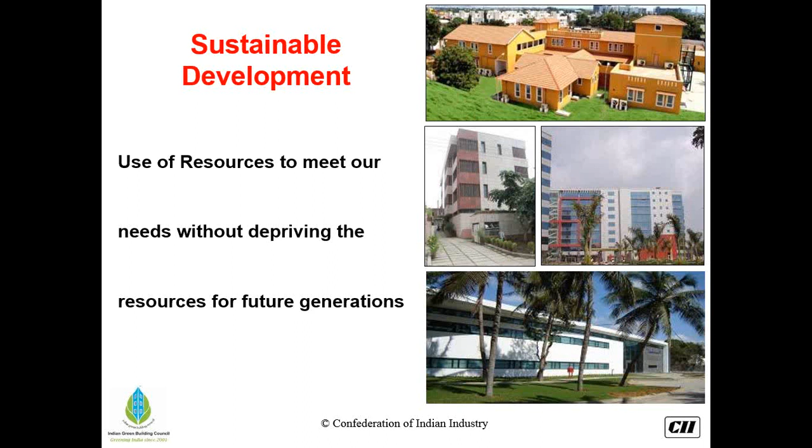So sustainable development is nothing but looking at resources which we can conserve and which can be kept for the future generations. What is green? Green is not just a color anymore. Now we are seeing green in a different perspective. It's a pursuit in whatever we do in our daily activities, like the energy we consume, the water we consume, whatever materials we use, how we are going to use them effectively. That's what green is going to depict here.

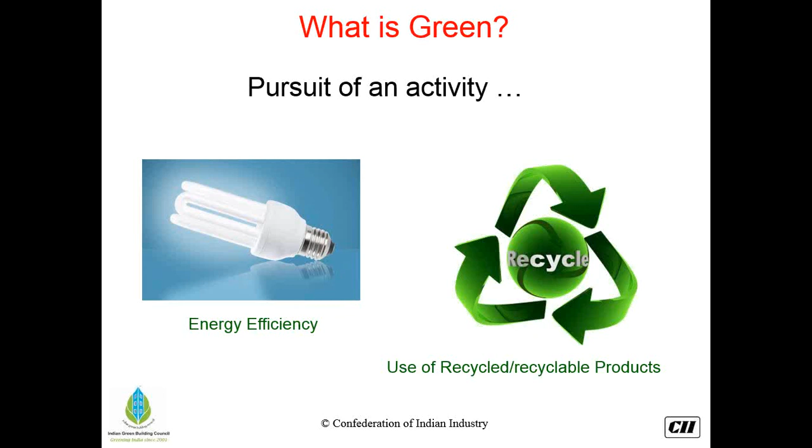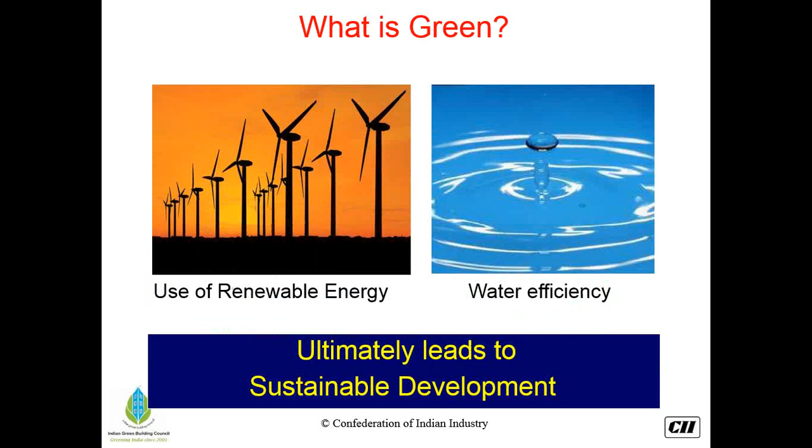So the main activities which come under sustainability are energy efficiency, use of recycled or recyclable materials, use of renewable energy, and water efficiency. So all this together is what we are talking about, sustainable development.

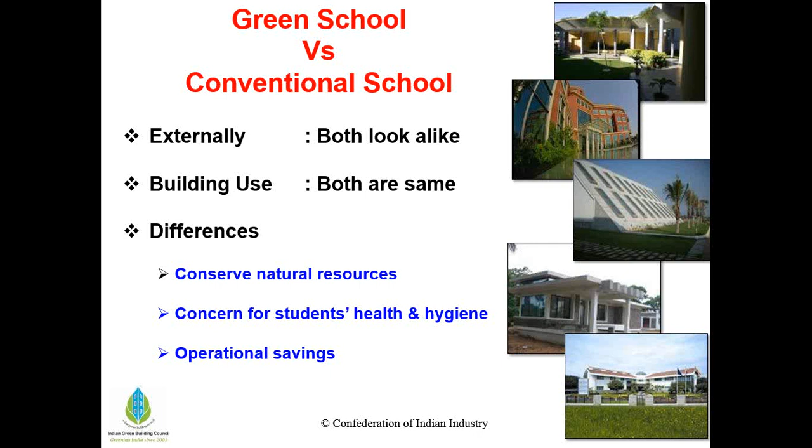So if you compare a green school versus a conventional school, externally they look the same, and the building usage will also be the same, but where the differences come is in natural resources, whatever we are using, like water, so that we can conserve them. And besides this, the biggest benefit is how we are having concern for the students' health and hygiene. So this is going to be the impact in your green school. Another important benefit would be the operational savings.

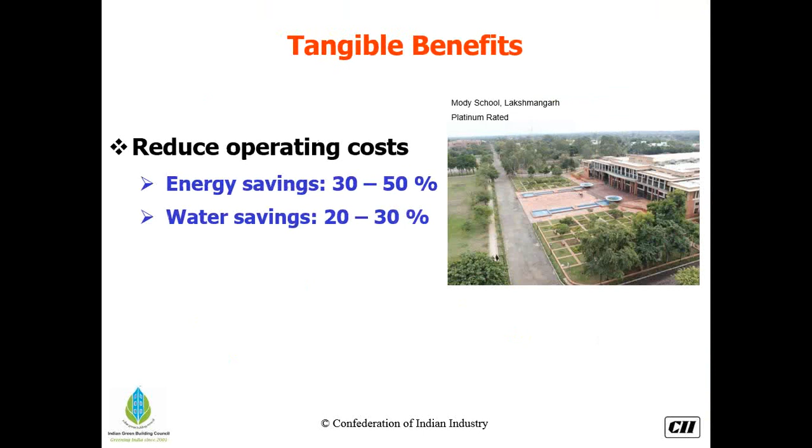So these are a few tangible benefits which we can see if you compare the conventional building and the green building. Reduced operating cost, like energy savings of 30 to 50% and water savings of 20 to 30%. Intangible benefits are like you can improve the output of students because we are enhancing the indoor environment. The productivity of the students will be improved in green buildings.

This is also another step: we are hearing about green in this generation, but the future generation is going to be the students who are occupying the schools now. So we are going to instill an idea of green in the students from here itself. So this will be another intangible benefit which will impact our future also.

There is a saying by Einstein: if we are given an hour to save the planet, we would spend 59 minutes to define the problem, so what is the existing problem we have to think about, and 1 minute resolving it. So our further presentation will follow on this note.

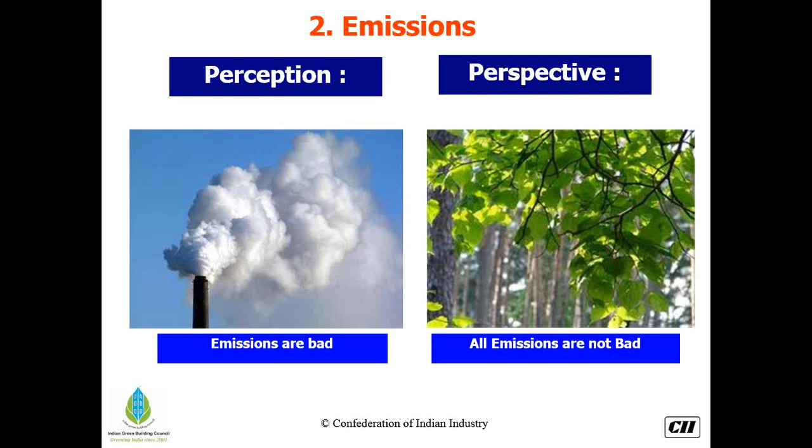So what we can do: if we see, in a day generally a human eats around 800 grams of food and drinks around 3 to 4 liters of water. But if we look at air, we take about 17 kilos of air per day, which is very huge. And if we convert it, a healthy grown tree will generally emit 20 kilos of air per day.

So each person needs more trees than whatever oxygen they are consuming. That's why we recommend more trees to be planted. Please don't see having vegetation as a waste of land. It is required for habitat maintenance and also for improving biodiversity in our environment.

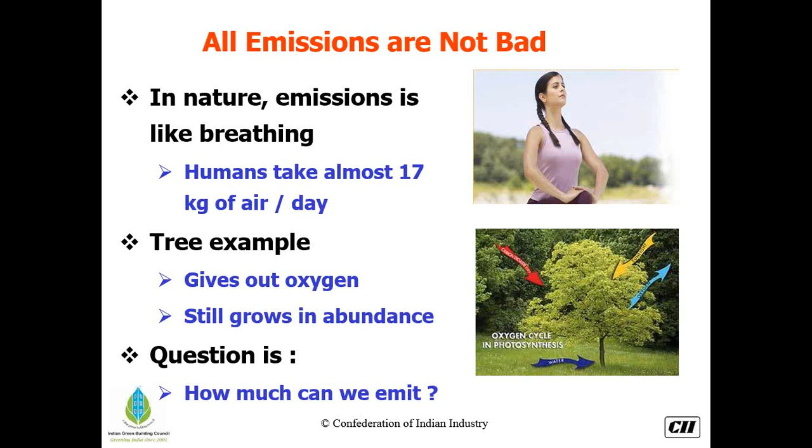So with whatever day-to-day activities we do, by travel or anything, we emit so much carbon dioxide. It is going into the atmosphere, but how can we reduce it? One of the major solutions we have is to have vegetation.

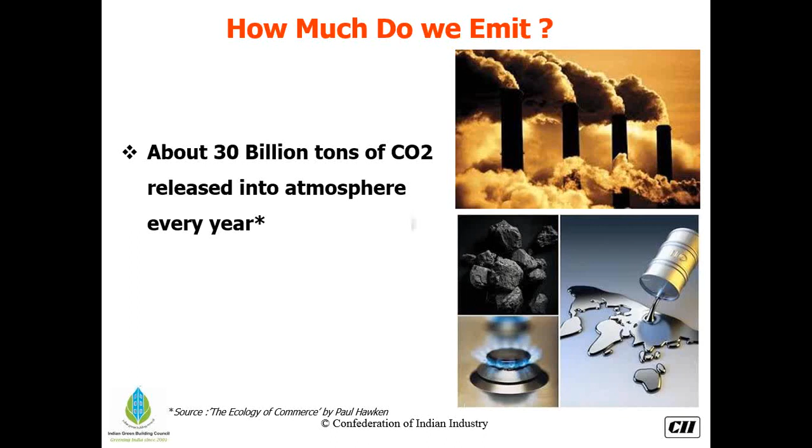Transit. We all transit every day. We see petrol or diesel bills going higher every day. We feel that okay, we'll pay even though it's increasing because it's a need. But what happens if we are willing to pay, but there is no fuel existing? We have extracted all the fuel. What are we going to do?

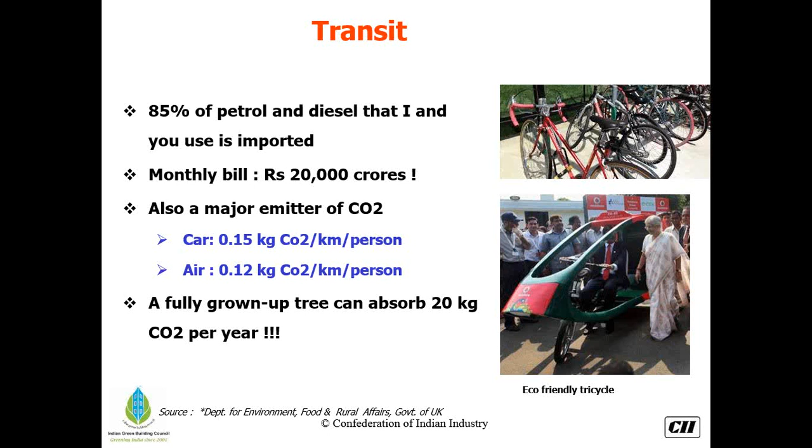So if we see the other perspective, that's where we recommend alternative transportation methods. Like you can use bicycles or you can do carpooling so that it will reduce the emissions to the environment. So these are a few alternative transport methods people can think about.

Water. There are many strikes, and many people do rallies saying that we are depleting our water sources and even the lakes are diminishing. So what do we have to do? But from the other perspective, with whatever water exists on our site, how can we reduce the water consumption on our site? If we see it from that perspective, that will be better to conserve our natural resource of water.

So the solutions would be: you can have treatment plants, you can reuse your wastewater within the site, and even for irrigation, you can have efficient irrigation systems. These are a few solutions where you can have water efficiency.

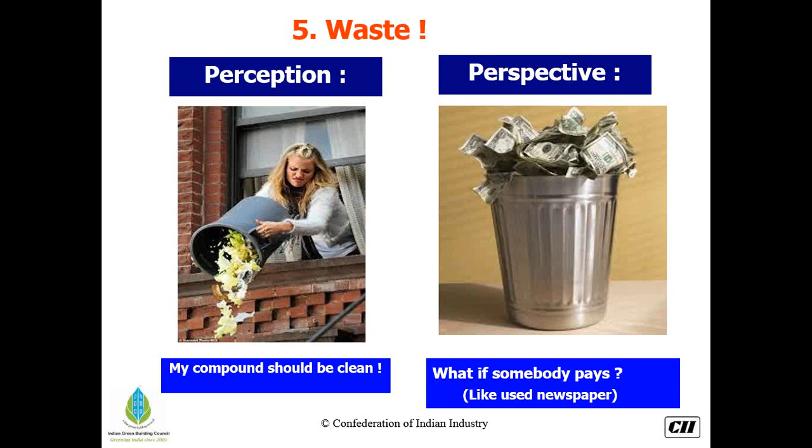Waste. This is a bigger problem many countries have. We always see waste as something that is going to give us a problem. It will be dirty, it will smell. So we want our environment to be clean every time. But if we see it from a different perspective, even waste can give us money if it can turn into an economical source. Like paper, we always sell our newspapers to the recycle vendors. So why don't we do the same with others also?

We can segregate our waste, paper, metals or plastics, and send it to recycling so that it will not be in a landfill creating emissions to the environment. At the same time, it is creating economic value for the rag pickers in India.

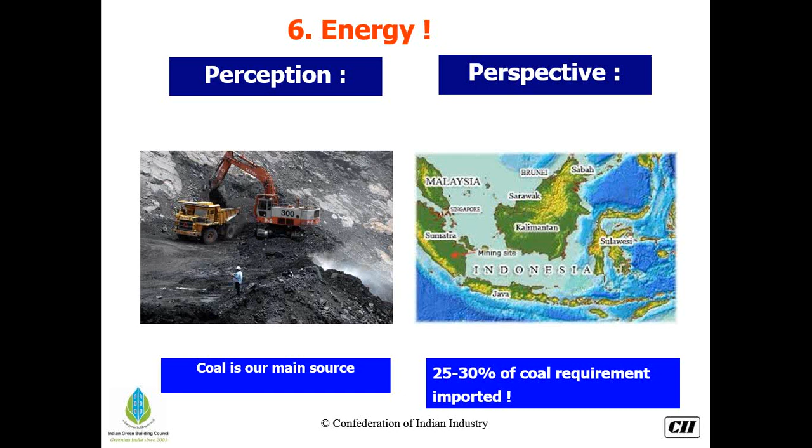Another important point in buildings is energy. Most buildings now have air conditioners. Other than this, we have lighting, fans, everything which consumes a lot of energy. For the creation of electricity, coal is the main source in most of India, and most of the time we are sourcing the coal from outside. We are importing it, and we are getting 55% from Indonesia itself, and the other percentage of coal from other countries.

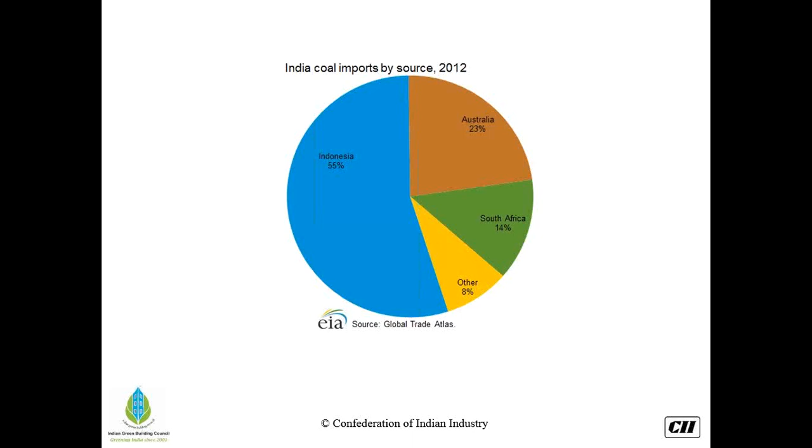So this is also affecting our GDP in India. So how can we reduce our energy consumption so that it will also have an impact on the country's GDP? Not only the country, even for an individual building, if we can reduce energy bills, it will be helpful for us. So renewable energy is one of the solutions to reduce our energy consumption.

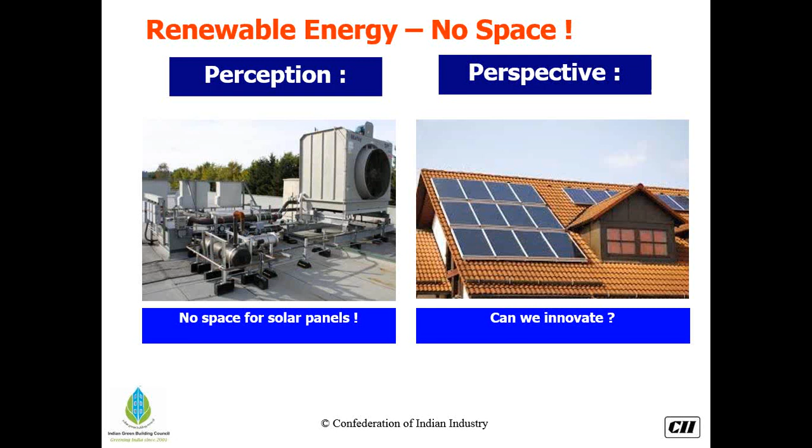When we say renewable energy, most people say our buildings' roof areas are mostly covered with equipment. We don't have any roof area to have solar panels. But we can look at it from a different perspective: how we can design our buildings so that we can install the solar panels in the building itself.

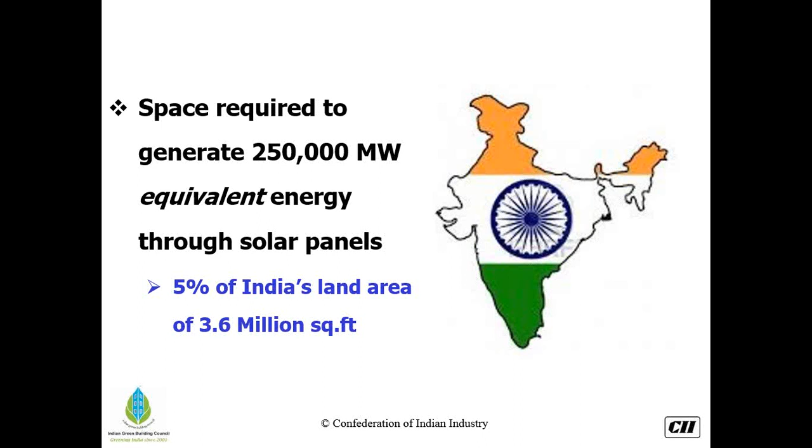Actually, this is a survey done, and we got to know that for whatever consumption we do in an annual year in the country, we just require 5% of India's land area to install the solar panels. So we have huge scope here, but it's just a requirement. We have to just feel how the renewable energies can help us in reduction of energy consumption.

So these are the initial perceptions we have given on green, how this has impact on our day-to-day activities and how it is affecting not only the country but even the world. So now we'll just get into our main topic, green schools. What are the major things which schools can implement so that they can convert their existing schools to green?

This is the CII IGBC vision: we want to facilitate and support 1,000 schools by 2017 to turn into green schools. With this vision, we have formed an IGBC Green School Committee, which does various activities related to schools. We do competitions related to environmental activities. We do quiz programs. We even conduct workshops, and one of the major activities which we have launched is the IGBC Green School Rating, where we want to promote guidelines to the schools on how they can convert into green schools.

As I said, the green school rating system is the rating system which we have launched recently. It includes the guidelines, and it is applicable both for new and existing schools. It's not just for new schools. The top 10 green attributes which we are going to address today are related to health and hygiene, education, universal design, green lung spaces, handling of waste, water, energy. So these are the top 10 green attributes which we are going to address today.

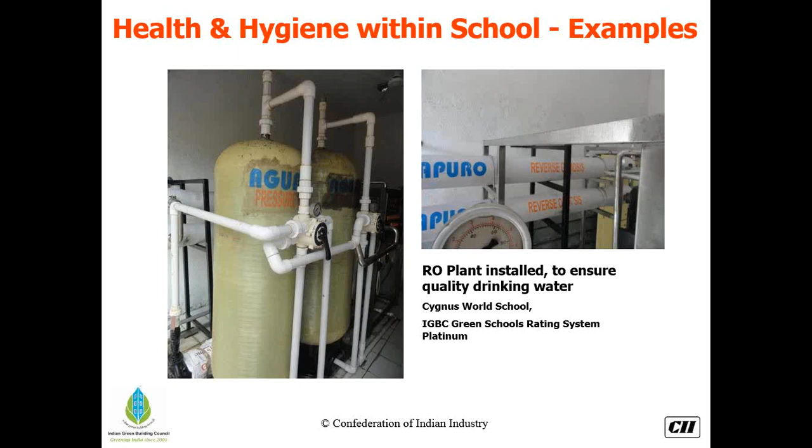Daylighting, as I said initially, has intangible benefits like improving the students' performance. Daylighting and ventilation are the points which will have impact on your students' performance. So daylighting you can provide. We have guidelines in the rating system: if you have a minimum of 200 to 300 lux daylighting in your spaces, it will bring much improvement in your students' performance.

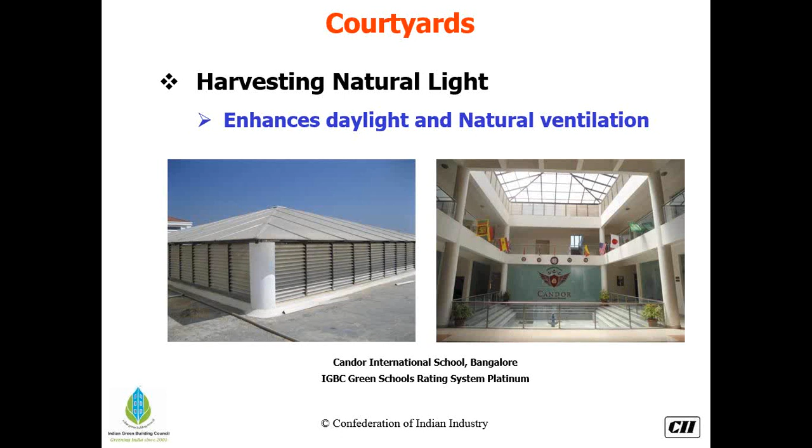So daylighting can be provided by having open courtyards, even the windows, whatever you are providing. If they can provide daylighting, it will be good for the students to better read and also see the presentation or whatever is written on the blackboards. These are the new technologies available when there is no space and they want to have daylight.

The next important point is on fresh air. Most of the schools do have enough fans or air conditioners, but at the same time fresh air is also required so that we feel better, or we feel healthy in the interior spaces, because most of the times there is no fresh air. The students stay there for a long time, and since many of the students are present in the same classroom, when there is no fresh air, they'll feel dizzy or feel nausea kind of a thing. So when proper ventilation is provided, they feel more comfortable.

So fresh air is recommended, and to have more fresh air into the spaces, we recommend cross ventilation. When cross ventilation is there, air is distributed all over the space in the classroom, and it also reduces infections, because they play, so there will be a lot of dust in their shoes or in the clothes. So this will reduce the infections from whatever they are carrying when there is fresh air coming into the spaces.

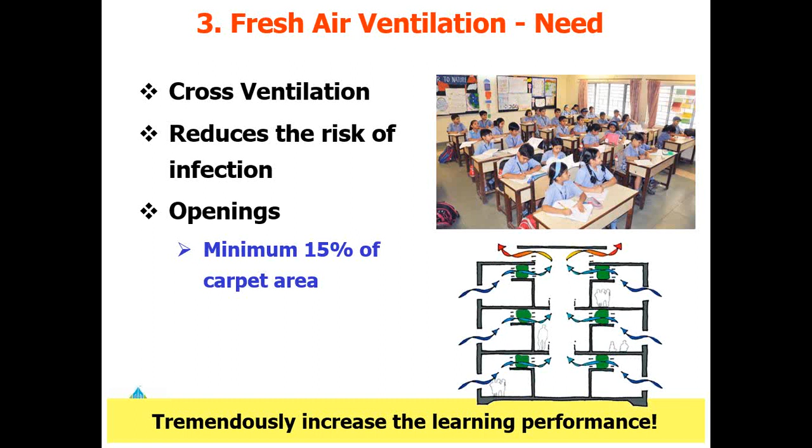So for that, we recommend that at least 15% of the classroom carpet area be provided as openings like windows or ventilators; even the doors are considered as openings. This will help fresh air come inside the interiors of the classroom. This is again the Salwan Public School where we have taken pictures, and there is a lot of fresh air coming through the ventilation provided.

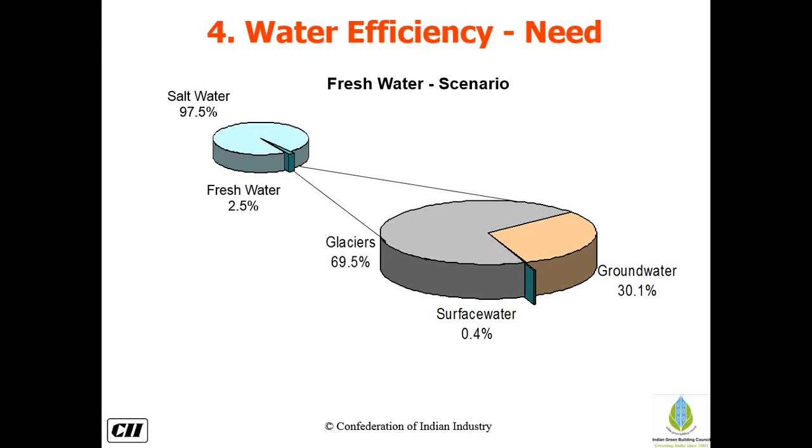So the next topic is on water efficiency. All of us know that Earth is filled with water, but of whatever water we have, 97.5% is salt water. So the fresh water availability is only 2.5%. Of the fresh water, whatever we can use is only the groundwater, which is only 30% of that 2.5%. So how we can reduce our water consumption and how we can have more water for our future generations, we have to relook at it.

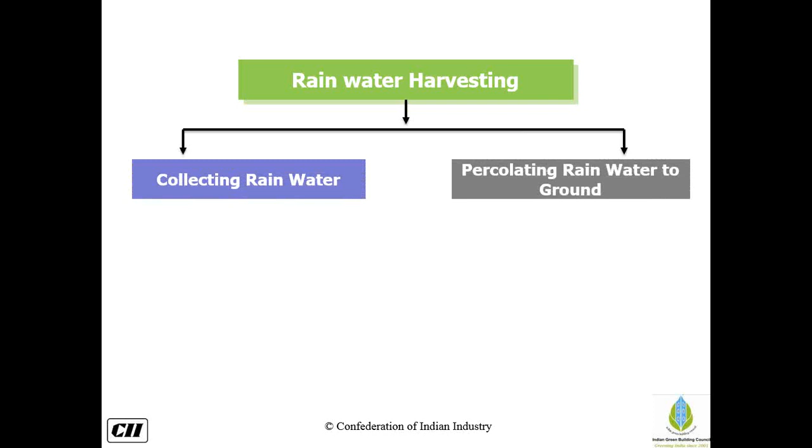One of the important solutions here for water conservation is rainwater harvesting. This is the natural source which will be generated within your site, within your school campus. So whenever you are getting rainwater, you can either collect it or you can restore it. This will help in collection of rainwater, a natural resource within your site, and also in percolating it within your site.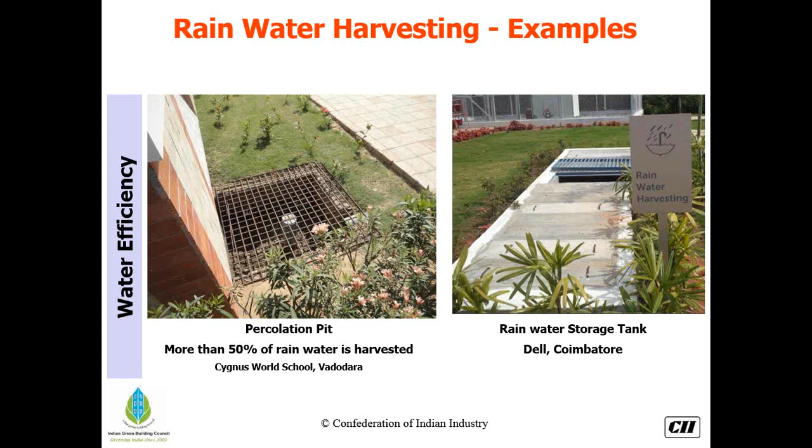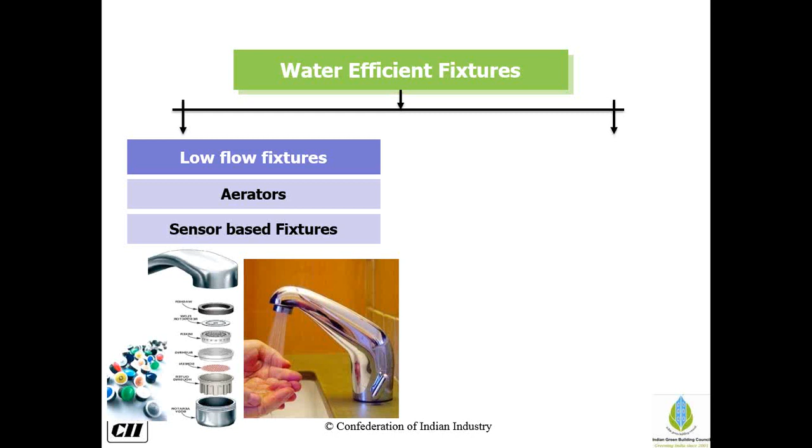So the next point, after rainwater harvesting, is on water efficient fixtures. Other than harvesting, most of the water consumption in buildings or in schools is either by drinking or by your fixtures in your toilets or in your pantry. So how we can reduce the water consumption in your fixtures we'll be seeing here. Now in the market there are many new manufacturers coming up with efficient fixtures like low flow fixtures, where the water will be coming slow, but at the same time you'll be reducing the water consumption.

Suppose there are existing schools and you already have fixtures fixed and you can't do anything. In that case, the solution is the aerators which you are seeing on the left hand side. There are aerators available from 15 rupees to even 3,000 or 5,000 rupees. So you can just use these aerators, which can reduce the flow of the existing fixtures in your school. That's how you can reduce it.

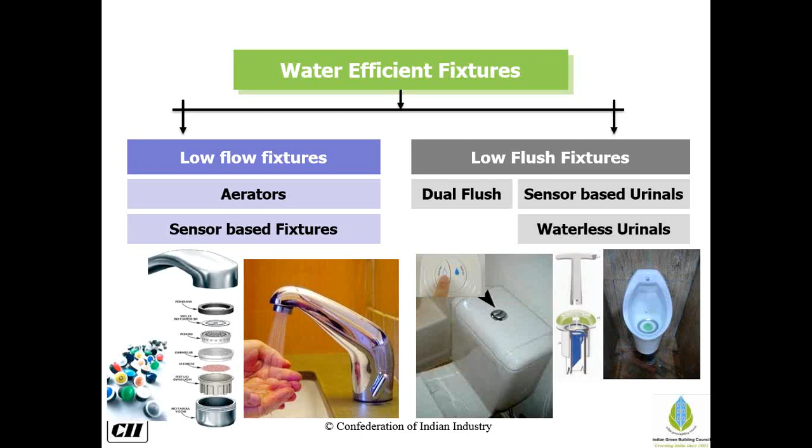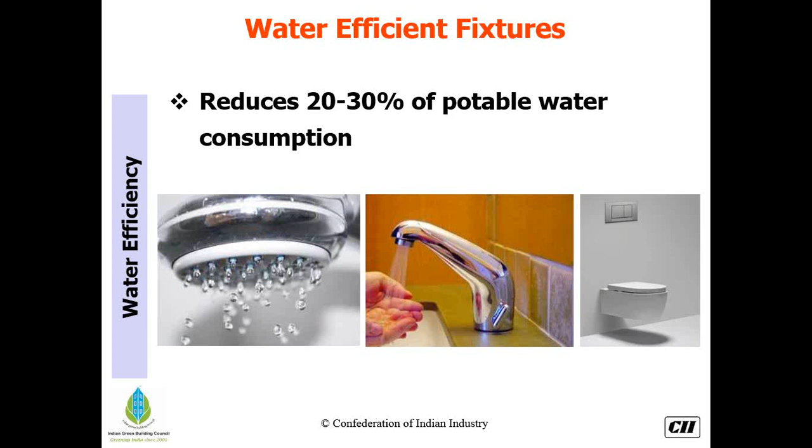And there are also flush fixtures now. Most buildings now are implementing dual flush fixtures, so there will be a reduction in water consumption, and also sensor based urinals are there, so they automatically flush when it's required. By having efficient fixtures itself, we can reduce 20 to 30% of the potable or municipal water we are using per day. So we recommend having efficient fixtures in new schools, and existing schools can have aerators to reduce water consumption.

Next, to reduce your water, is wastewater treatment. So we have seen how you can collect your rainwater and how you can reduce your fixtures. Now, whatever you have consumed, which comes out as wastewater, how can you use it? For wastewater treatment, we can have two types: either the mechanical way or the biological way.

The mechanical way we have been seeing for past decades: you can have an STP installed, treat your wastewater and reuse it. On the other hand, picking up over the past few years, is the biological way of treating wastewater, where plants treat the water in a natural way and you can reuse this water.

Phytoremediation. Phytoremediation is the biological way of treatment I was describing in the previous slide. The picture you are seeing is the existing phytoremediation plant in our IGBC center, which we implemented last year, and all the wastewater coming from our site is treated through this phytoremediation and we are using it for our irrigation purposes.

These plants are specific species that take the wastewater, and whatever waste is available, the nitrates and urea existing in the wastewater, they will consume. They take that as nutrients and treat it. The treated water will be collected at the end point and reused.

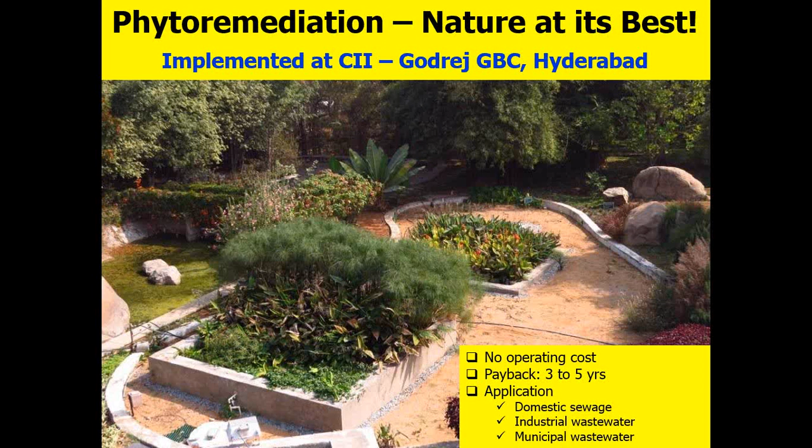If you see the advantages of this biological way of treatment: STPs are just a normal mechanical way, and you don't have any green spaces. Here, you maintain it as a garden space. They don't require any maintenance, only pruning. Whenever the plants grow hugely, gardeners just need to prune them. And as vegetation, they attract habitat. They'll not have any heat island impact because they don't emit heat outside, they absorb it.

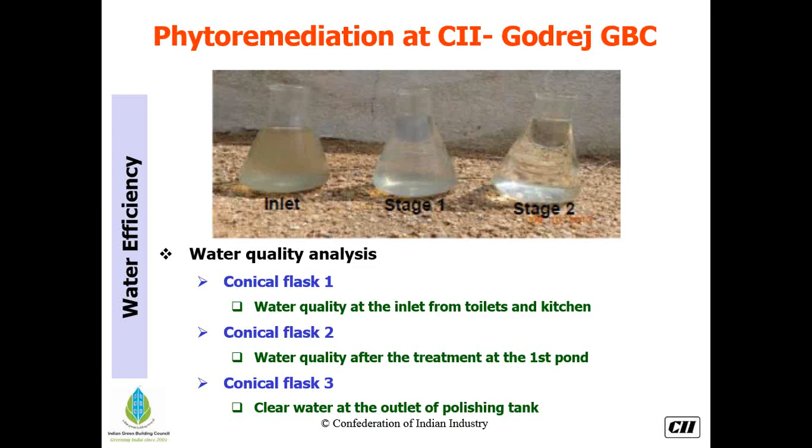This is a water quality analysis we have observed at our site. If you see the first conical flask to the last one, there's a lot of difference. That's how the water is treated by this phytoremediation, and we are using it. So these are a few features you can implement within your site to consume less water and conserve water at the same time.

Next we'll move on to energy. We see a lot of power cuts because there is a lot of usage of power, and as much energy as we are using is not produced. So how can we improve energy efficiency on our site itself? One of the major sources of energy consumption is the fixtures we use. Most schools use tube lights, so we can use energy efficient or BEE star rated tube lights, which can reduce your energy consumption by at least 20%.

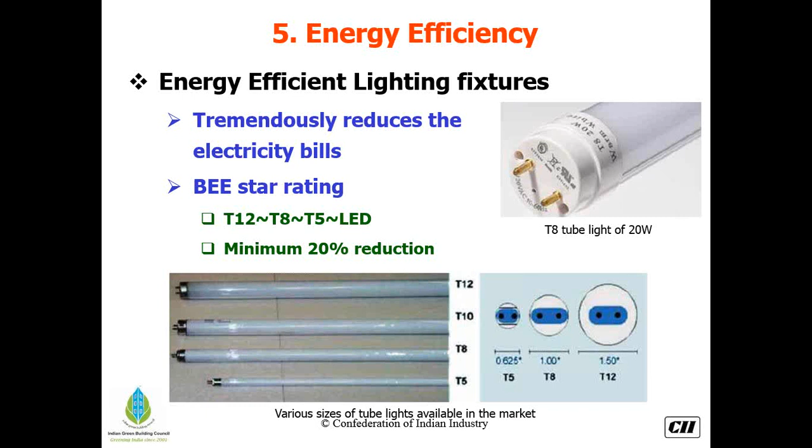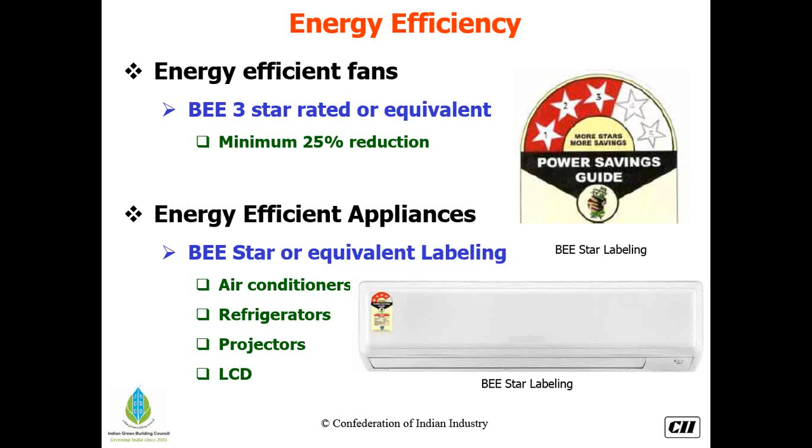Even for other appliances such as fans or split ACs in your classrooms, principal rooms or staff rooms, you can look at BEE star rated appliances because they consume less energy. Other appliances like refrigerators, projectors, LCDs, whatever you use in your school, you can go for energy efficient, star rated or equivalent appliances so that they consume less energy.

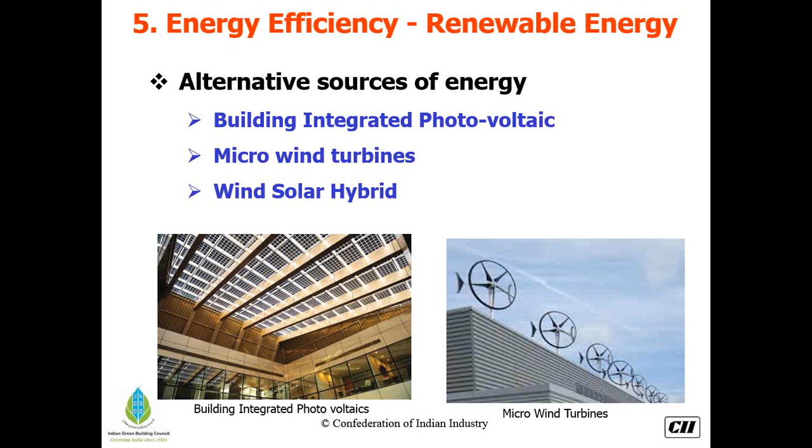Another way of reducing energy consumption is alternative sources of energy like solar panels, which you can implement on your buildings. A few alternative sources of energy are indicated here, such as building integrated photovoltaics, micro wind turbines, and wind solar hybrid. There are also hybrid renewable energy systems available. These are a few schools which have already implemented solar panels and are using them effectively.

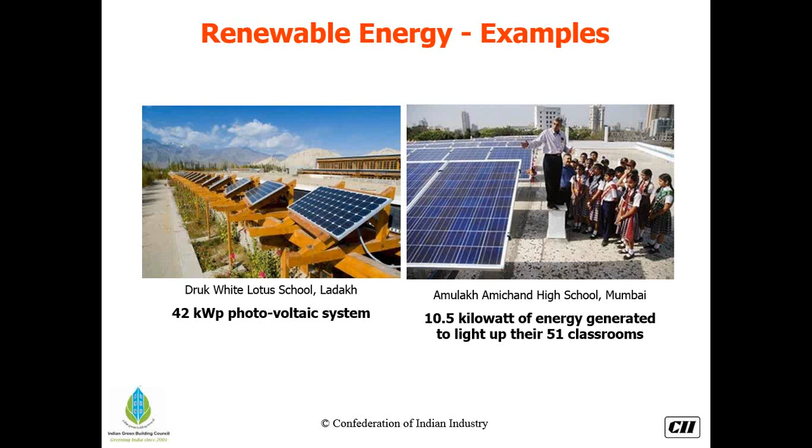Even if you don't have enough space to keep batteries within your school campus, you can connect them to the grid so the energy goes back and you can reuse it. Many states provide incentives if you connect these alternative energy sources to the grid. So you can think about how to implement renewable energy sources on your site.

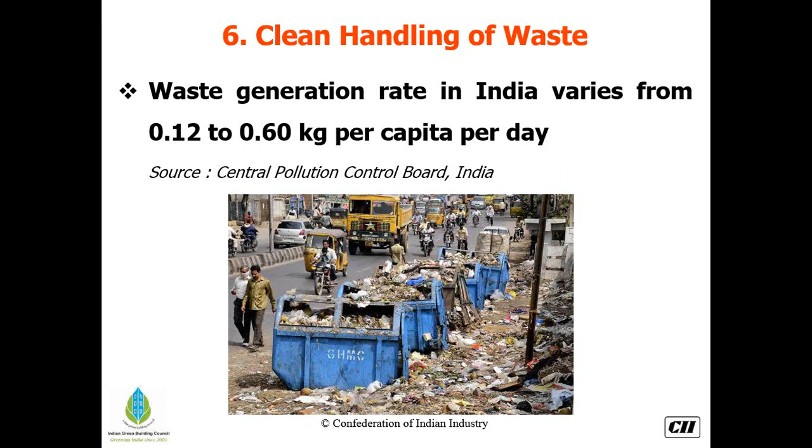As I said, waste is one of the big problems we face. Wherever we look there are a lot of landfills, even on the roads. It creates a lot of unhygienic conditions and health problems. Not only health problems, when this waste is combined in landfills, it creates emissions which cause global warming through GHG gases. So how we can reduce it is to segregate our waste at the source itself.

You may think there is a lot of waste already, and just by doing it within the building, how much can we do and how is it going to affect anything? But we have to start from our source; only then can we see a change. We as students are going to be the future.

This could be one of the activities you can tell them: whatever paper, plastic, or metal waste is generated in the classrooms, if they segregate it at the school itself, they can take that home. At home also they can segregate it. They will in turn teach their society that you have to segregate the waste and send it to recycling. Do not send it to the landfills.

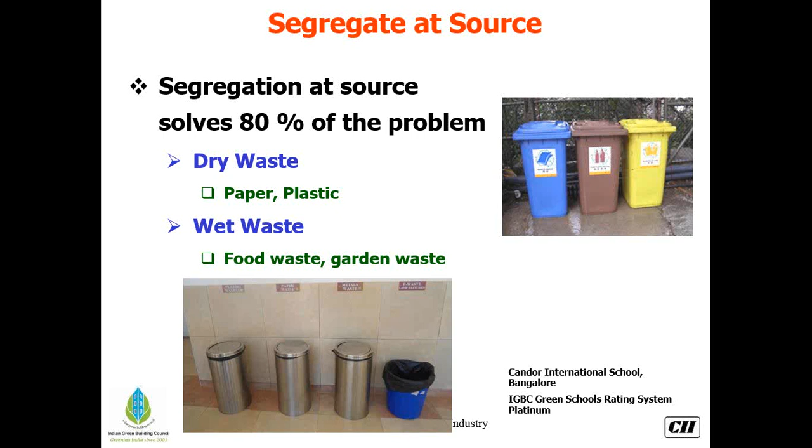So you can create separate dustbins for paper. Mostly paper waste is generated in schools, so you have separate paper dustbins, and also wet waste dustbins: the food waste generated during lunch times or snack times, they can put into the wet waste dustbins. Whatever dry waste is there, we can send for recycling. As you know, paper we send for recycling, and plastics can also be sent for recycling.

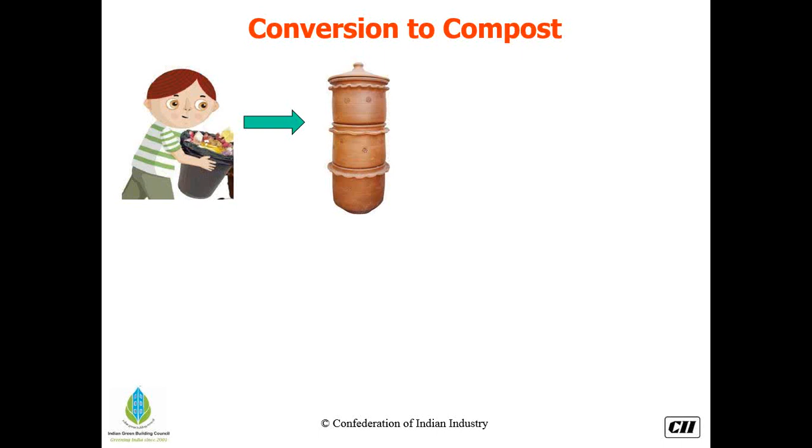You can just put your waste into this recycling canvas, and after one month of putting in your organic waste, it will turn into very good manure which you can reuse again for your landscape. So no more waste. You need not buy whatever compost is required for your vegetation. You can just generate it within your site itself and reuse it.

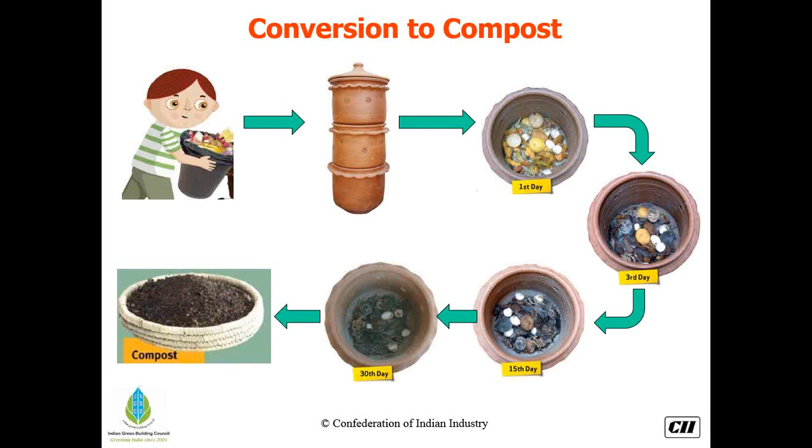These canvas bins are also very small, so you can just keep them in any corner. Even at homes, you can use them on balconies. So this is very handy and also very effective. This is how compost is generated from the composting beds.

Next is green transit. As I said, we use a lot of vehicles. Each one of us has a car in the house; we can see at least 2-3 cars for each house. So there are so many cars on the road, so many emissions, so much pollution being created. So we can think of alternatives and how we can reduce this.

Especially for schools, I think most of the schools in India do this. They have their own school buses where most of their students travel by school bus. So encourage your students more to come by school bus than by their own vehicles, so we reduce these emissions. And those who are nearby can come to school by walking or bicycle.

If you are planning, suppose many schools have a group of schools and they will be establishing new schools. When you are coming up with new schools, you can think about having the schools within a residential area, so that whoever lives in that residential area can come to the nearby school by walk or bicycle.

And public bus or rail: there will be a few schools, like municipal schools or even normal corporation schools, where some of the students come by public bus or the metro rail available in the cities. So select your new school site such that it's near the public bus stand or railway station, so that students will be encouraged to come by public bus.

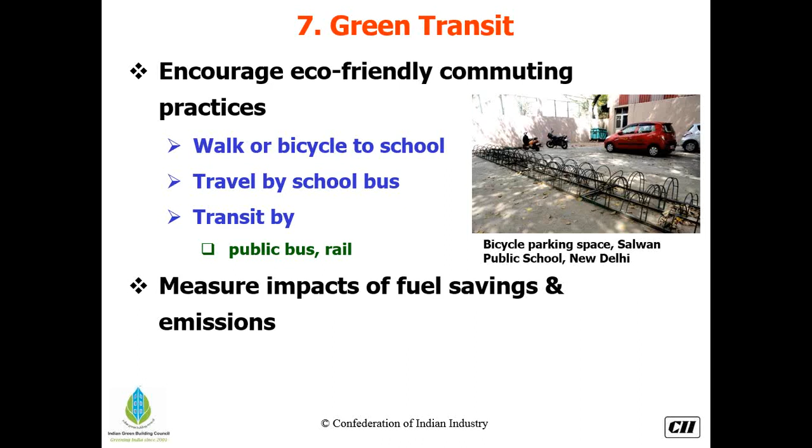Green lung spaces. If we see olden days, or even now, many schools do have them, but some schools don't even have the space to put small pots. We just see concrete spaces or paved parking spaces in the schools, which are creating a lot of heat island effects.

Heat island effects are nothing but these paved areas; they don't absorb the heat, they emit the heat into your environment. So they are creating a lot of heat, and there is no fresh air. Most of the time they are on the main roads, so whatever pollution is coming from vehicles will be coming into the school environment. So there are very few healthy spaces or green spaces in the school campus.

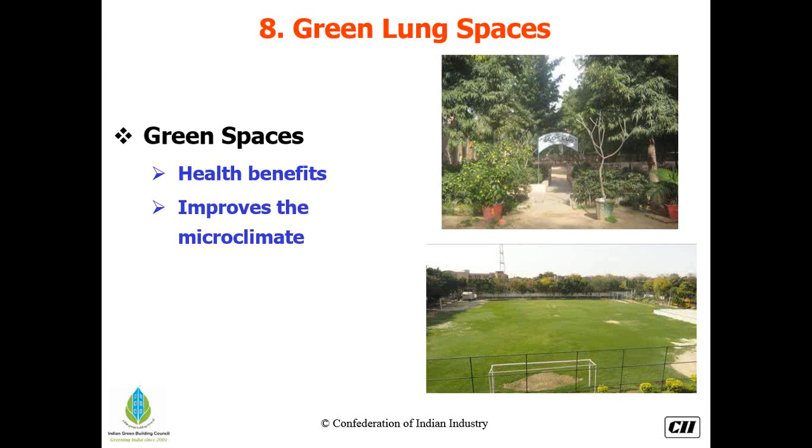So we encourage, please increase the green spaces in your school building. If you don't have enough setbacks, please come up with roof gardens. Even roof gardens will reduce the heat emissions inside your building, so the top floor of your school building will not have a lot of heat coming inside. So please encourage more green spaces.

A lot of schools are having, as a green activity, organic gardens. Their students themselves are developing them. So students own that activity, and they know the importance of the green or lung spaces required for them. This will not only create a healthy environment, it also creates good habitat for butterflies or birds flying in your site. This will also encourage biodiversity in the ecosystem.

Not only green spaces, but other activities too. Most schools don't have a playground itself. They have some other option, like they lease one and take their students to those playgrounds. But we encourage, do have playgrounds so that students can play there, because playing is required in their daily activities, which improves their health and releases their mental stress. So playgrounds are also important.

Please do create playground areas, for both outdoor and indoor activities in your school, so that it will have more healthiness and improve the activities of your students.

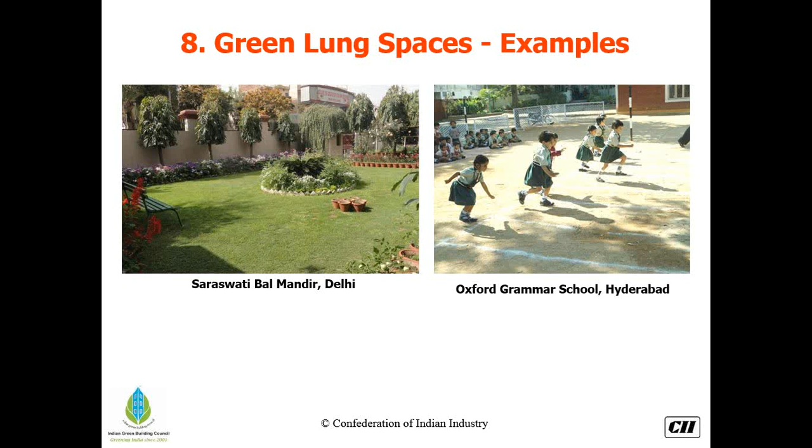Universal design. Not only schools, any building should be designed for everybody. Recently we have been seeing in news articles that since there are no ramps or hindrance-free movements, differently abled people are finding it very difficult to get into even normal public buildings, like post offices or hospitals. Since they don't have this criteria, they are facing a lot of problems.

So this is one of the important design things we have to keep in mind when designing our new school. Please design it for everybody. Have hindrance-free movement for differently abled people. Hindrance-free in the sense there should not be many steps at the main entrances, so that they can move easily. Please do keep ramps so that they can take wheelchairs on the ramp and come inside the building.

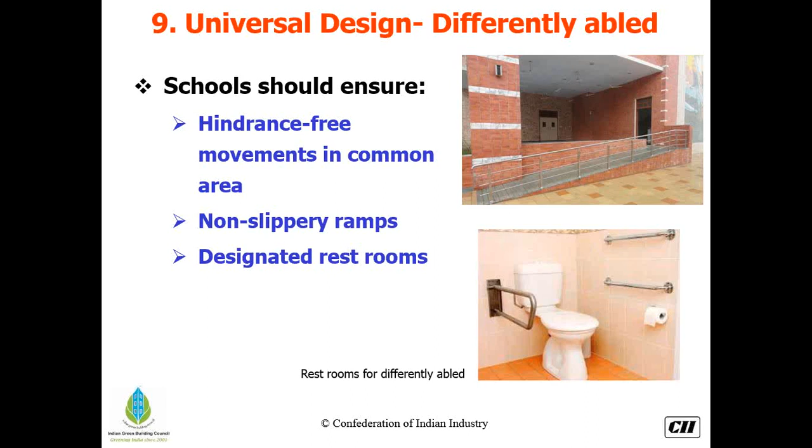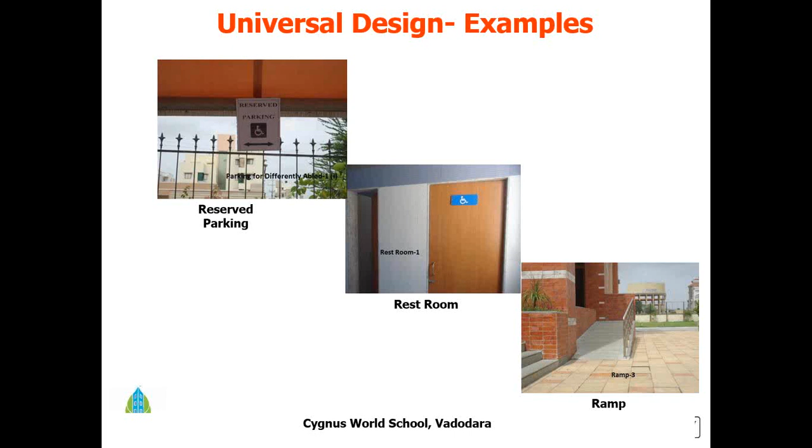Please provide designated restrooms for them so that they can comfortably use the restrooms. These are a few design criteria you have to implement for differently abled people. Even parking: reserved parking near the entrance, maybe at the starting point of the parking area. If you can provide that for differently abled people, they will be able to move easily. These are a few buildings which have implemented that, as you can see in our pictures.

And last but not least, green education. We have been talking about green for past decades, but the students are the future and they are going to see future decades. So educating them on the environment and a sustainable way of living is very important now, because we are facing problems like pollution, no water, less electricity produced. If we can educate them how to live in a sustainable manner, this will definitely have an impact on our future generations.

So please do have some activities. Most schools now have environmental education as part of the curriculum. So don't just keep it in the curriculum; please turn it into activities. Many teachers would have observed that rather than just theory, when students have seen it practically or done the activities, there is a lot of impact on them. So please do encourage them to do environment-related activities.

It need not be just a project. Even if you are taking them on educational trips, like the zoo, they are going to see the different species which exist.